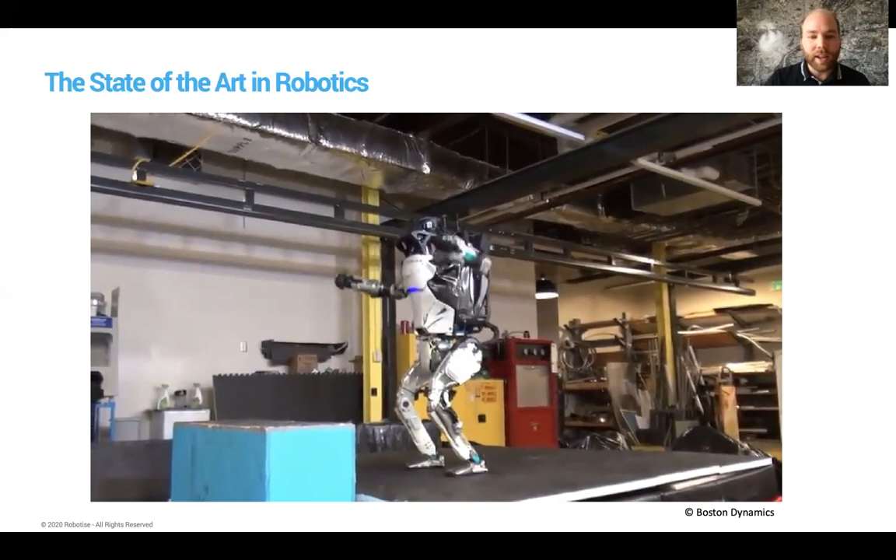Well, so some people are hesitant, and they point out to me, they say, hey Johannes, half of the jobs are probably going to be automated in 15 to 20 years. And there are studies that actually show that a lot of jobs will be automated. So obviously this is making some people uncomfortable. Because until now, humans, whenever there was technological progress, could adapt with the speed of that progress fairly well. So old jobs got automated away and new jobs were created at the same time.

Well, obviously that happened because else we'd all still be farmers. But this happened at a pace so that people still could do their one job their entire lives. And you probably know somebody who did work the same job their entire lives. Who knows somebody? Raise your hand. I can't see you, but just to mix it up a little. So even maybe you are somebody who worked the same job their entire life.

So what we don't know is what will happen when the speed of progress is accelerating, meaning that there's tech at an ever increasing speed, and everything is mixing up in a few years' time, very soon. Will people still be able to adapt, or will there be a kind of mass unemployment scenario, like some critics of progress may say?

And I believe it's up to us. It's a choice, it's an active decision that we have to take. We shape our own future. So what do we decide? In which direction do we go? If you ask me, I believe humans are incredibly adaptable, and we always find a new way and adapt to the increasing speed of progress. It's just another challenge that we get to solve.

So, well, you would say nicely said in theory, but how do we actually do it? How do we get on with it? So there's three things I believe that are important.

And the first thing is continuous learning. So learning is already very important and will be even more important in the future.

Many people will change their job, their profession in their lifetime. It's not like it was before. People will change their profession, their focus of their career, and people talk about it like it's a bad thing. I'm telling you, it's a good thing. It just needs a change of mindset, because you create more value when you export your expertise from one area of your profession to another. It just needs a mind shift.

Ask me, I studied architecture, and now I'm building robots.

Second point, which is also important, is new jobs will be created, at a pace that we don't even know today. So we will work with this technology. It will be tools. It will enable us to do different things, new things in the future that we can't even think of now.

And third most important thing is that we will work close with that technology, the so-called human-robot interaction. And like I said, it's going to be like tools for us.

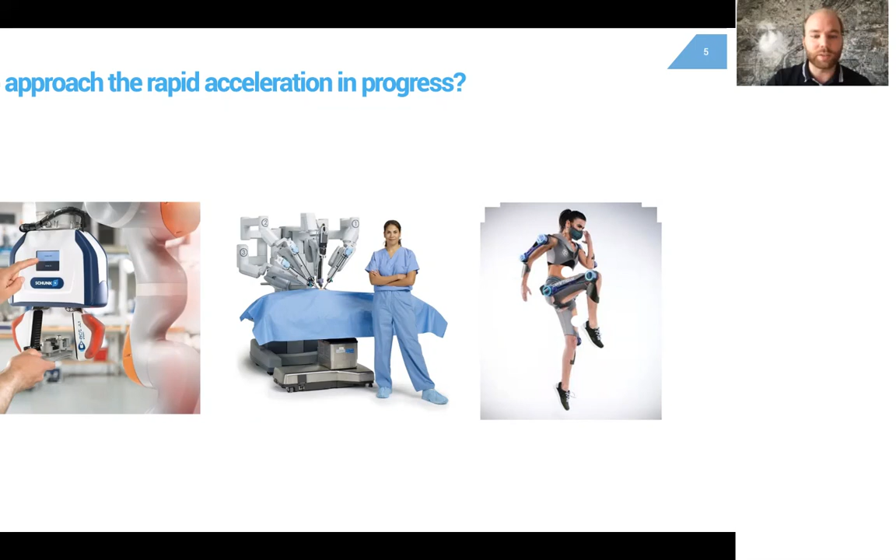In the end, I truly believe, as long as man and woman, as we can think, as we can use our brains, we will always find something that we can do better, improve, be entrepreneurial about it, create more jobs. This is what has happened in the last thousands of years, so I believe this will continue. There's no reason to believe that this may suddenly change.

So who am I to talk about these things so confidently? I said in the beginning, we build professional robots. We build Jeeves. Jeeves is a professional robot. When you look at the categories, there's all kinds of robots. Don't worry, there won't be a test, you don't have to memorize this slide.

So Jeeves is a wheeled robot, and it's a modular robot. And it's focusing on the economics. The difficult part about robotics is to make the economics work, and I believe we did a great job with Jeeves.

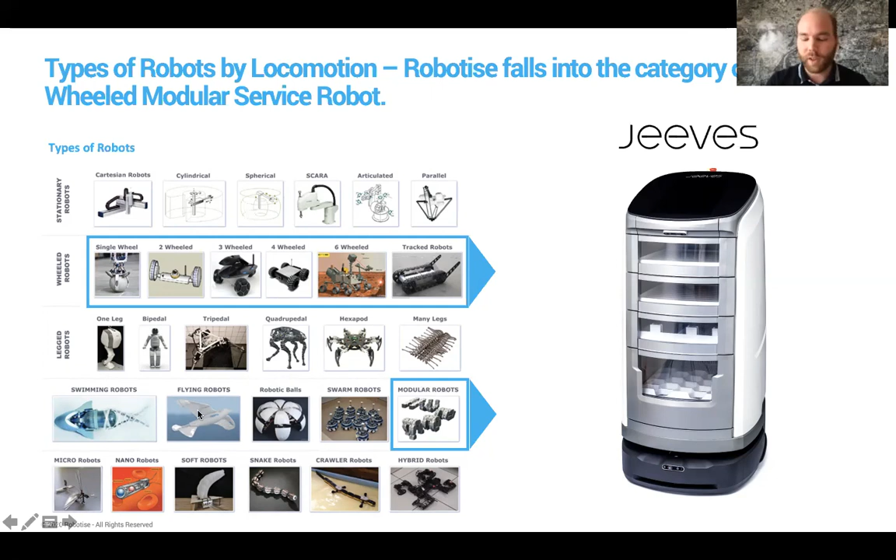So where do we use it? Where does Jeeves actually get to do some work? Mainly two areas: one is hospitality, the other one is health. Hospitals, care homes, and so on, and on the other side, hospitality, like hotels and so on. I'm going to be focusing on hotels, obviously, since this is what I assume you guys are most interested in.

I'll show you briefly what Jeeves does in a hotel in this video.

So summing up, Jeeves is a minibar service, automates a minibar service. It has a stock of items that it always carries with him, and guests call Jeeves to their rooms if they want something, a snack or drink. Jeeves has a delivery drawer, so you can put room service in it, or a toothbrush or something you may want to deliver to your guest room. The robot collects feedback, and lobby infotainment is a feature we're rolling out in 2021. I'll be glad to explain more in a conversation later on.

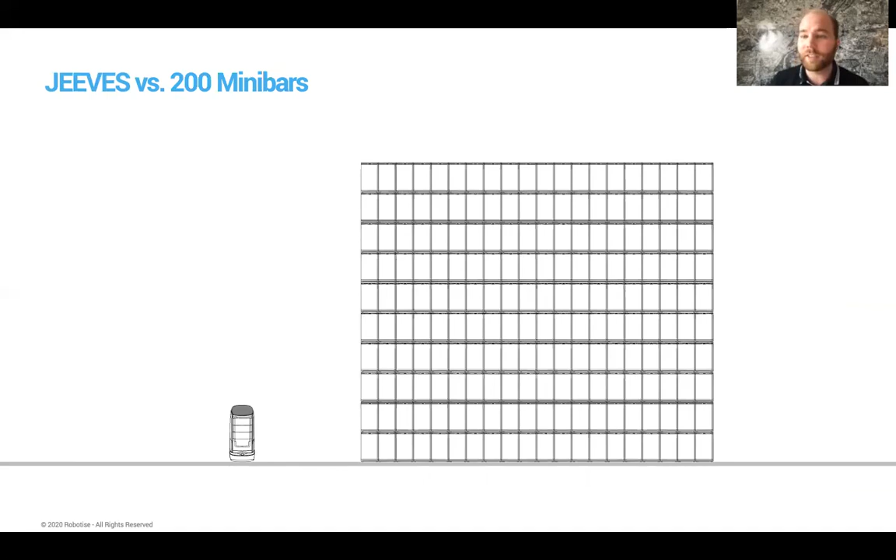So if you just think about what's possible, what does that mean for the future of a hotel? Just thinking about the minibar case: instead of taking care of hundreds of little fridges and sending your staff on delivery runs to the rooms, a robot does it suddenly. And, okay, you've got people working for that right now, and that means when you deploy a robot, you don't need any staff any further, like the hotel will be fully automated.

I say hell no, obviously not, because these minibars are mostly refilled by trainees, young people straight out of school. Does a trainee need to learn how to restock a fridge? No, they can barely restock their own fridge. Maybe it would be good, but no, we don't have to make them learn it just because we learned how to do it. So that makes more opportunity, more room to learn something else, to be more creative, to be full of empathy, because this is what humans can do best. They will learn how to do different things, different tasks that create more value than restocking the fridges, for example.

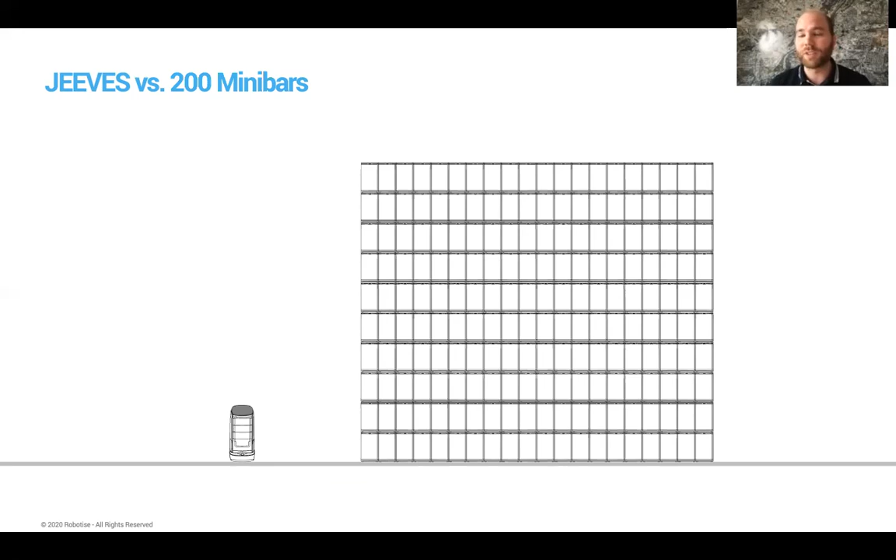So this is the chance, the opportunity for robots in the hospitality industry. Get in touch if you have any questions, if you'd like to speak with me about robots for your hotel project. I think it's pretty cool, and it's definitely a highlight for the guests. So thanks, Hilary, for the opportunity.